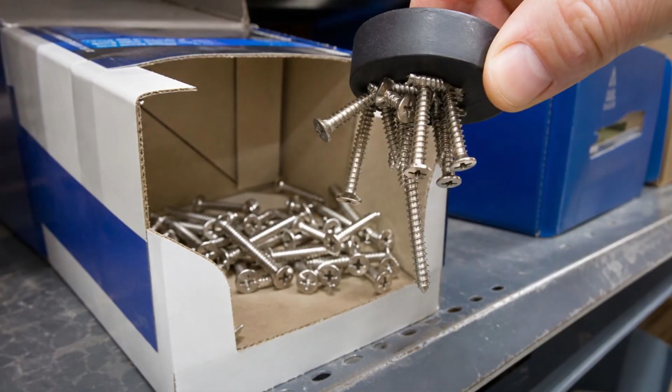Touch a refrigerator magnet to a box of screws labeled stainless steel. Some of them will jump to it. That reaction tells you something real, and it also produces false alarms on perfectly good screws, and almost nobody in that aisle knows how to tell those two cases apart.

We went through fastener industry technical guidance, a Department of Energy manual on counterfeit parts, and the metallurgy of how a screw is formed. One federal audit of its own supply rooms turned up 159 stainless fasteners carrying grade marks that had been stamped on by hand. Those parts cleared a full procurement system on their way in.

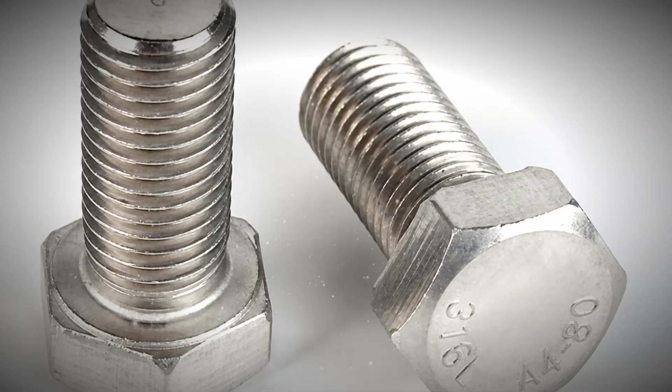The switch away from that alloy happened for a reason nobody printed on a box, and it comes down to how hard a screw must be to drill its own hole. We are covering what changed, what the magnet actually proves, and the two checks that hold up.

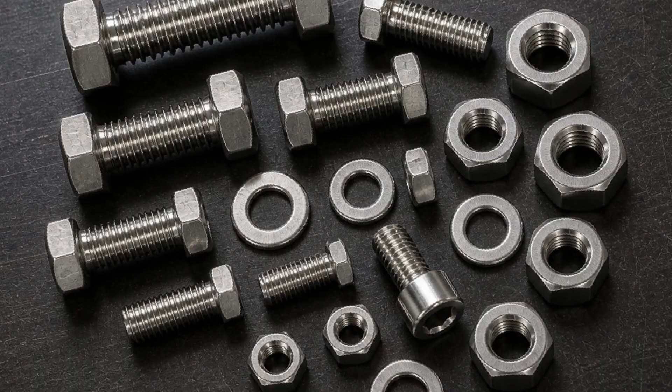Six bins sit on the fastener aisle, every one of them labeled stainless steel, and the prices across them vary by a factor of 4. Nothing on the front of those boxes explains the spread. Stainless is not one metal. It is a family of alloys sharing a minimum chromium content, and the members behave so differently outdoors that treating them as interchangeable is how decks end up streaked with rust after 2 winters.

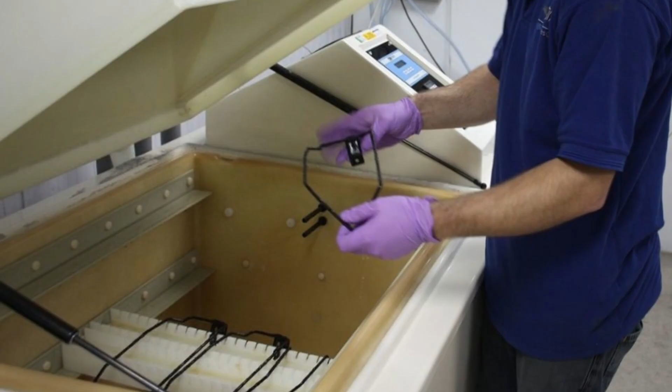The austenitic grades carry chromium and nickel together. That combination resists corrosion extremely well and leaves the metal comparatively soft. These are the 300 series alloys, and they cover most of what a homeowner should be buying.

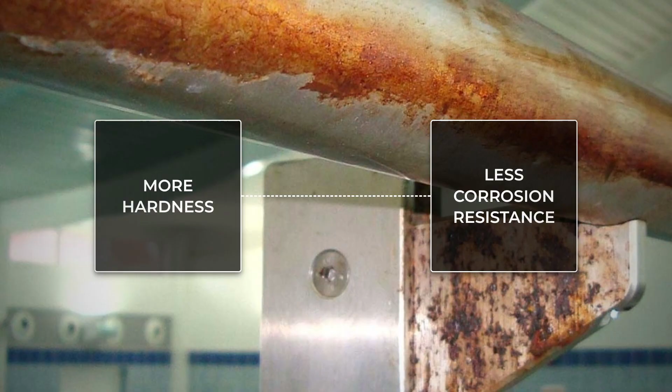The martensitic grades sit in the 400 series, built around higher carbon with almost no nickel. They can be hardened by heat treatment, they hold an edge under load, and they trade away a significant share of their corrosion resistance to get there. Ferritic grades occupy a middle position, magnetic like the martensitics, common in appliances and exhaust systems.

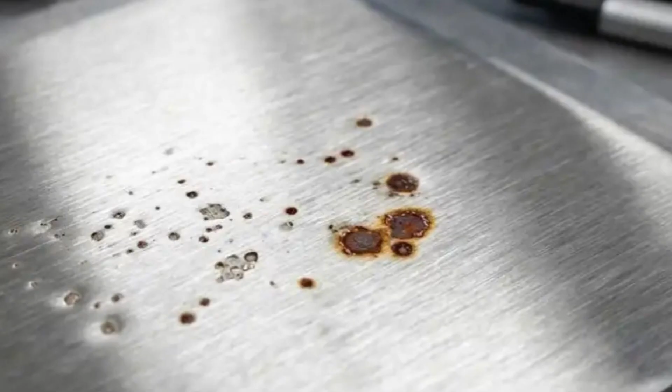Four grade numbers matter once you are standing in that aisle. Types 302, 304, and 305 make up what the trade calls 18-8, named for roughly 18% chromium and 8% nickel. Their corrosion properties are close enough to treat as equivalent.

Type 305 exists for a specific manufacturing reason. It was developed to improve the cold heading qualities of 18-8, meaning it forms into screw heads without cracking or galling during production, which is exactly why deck screws end up made from it.

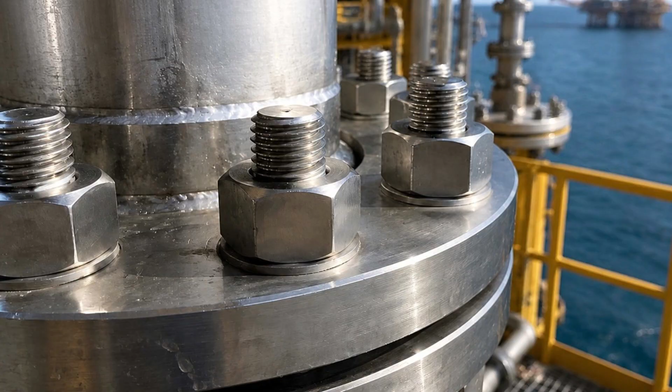Type 316 adds molybdenum. That single addition is what makes it the grade specified around saltwater, pool chemistry, and coastal air. Type 410 is the hard one. 11 to 13% chromium, no nickel at all, heat treatable, cheaper.

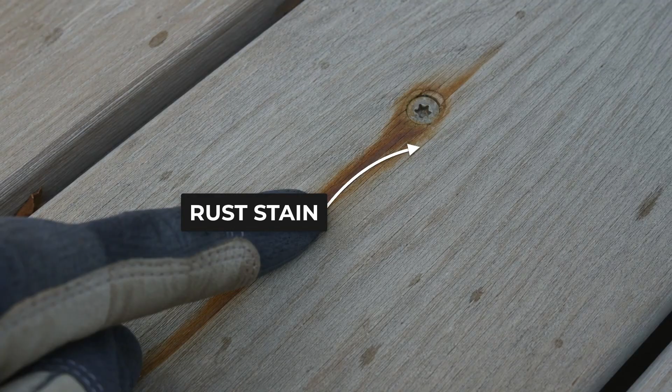The difference shows up in ways you can see. The 18-8 grades may pit and discolor in saltwater or other high chloride atmospheres, and when they do, the color bleeds through finishes and streaks the wood surrounding the fastener. That brown weeping down a cedar board is the screw failing in public.

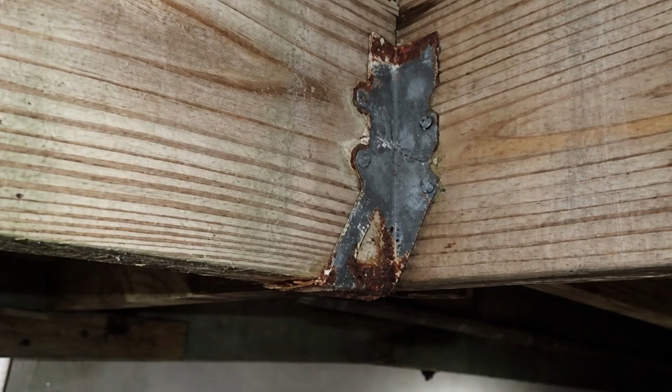With 410, the problem runs deeper than appearance. The 400 series alloys are vulnerable to hydrogen-assisted stress corrosion cracking, and prolonged exposure to harsher conditions can develop harmful rust that weakens the connection itself.

Every bin on that aisle can legally use the word stainless. The corrosion performance between the best and worst of them varies by considerably more than the price does. Which raises the obvious question about the magnet in your kitchen drawer and whether it can sort any of this out.

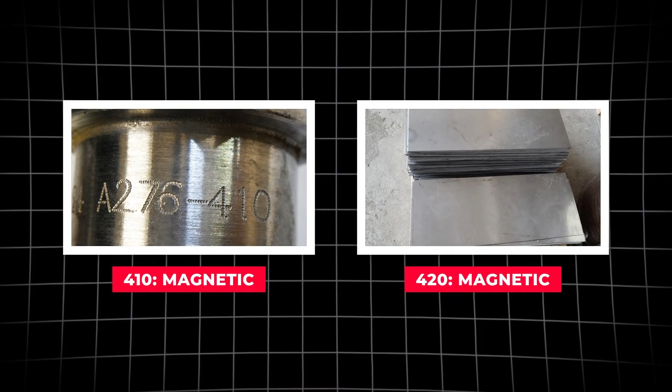A magnet works because of how atoms arrange themselves inside an alloy, and stainless comes in arrangements that differ from one another. In bar stock or sheet, 304 and 316 are non-magnetic, while martensitic grades like 410 and 420 are magnetic by nature. Testing raw material with a magnet is straightforward, and it gives an honest answer.

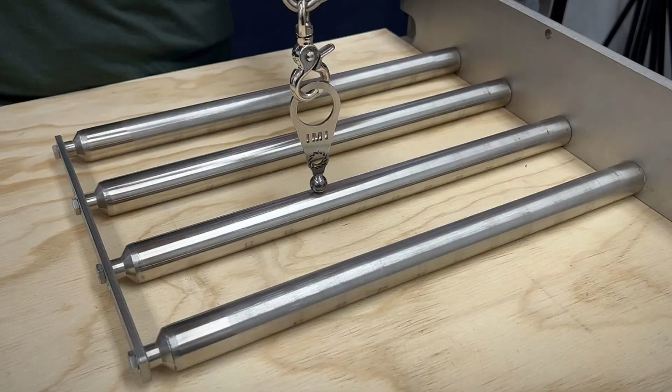A screw is not raw material. Screws are not cast in molds. They are formed by force. A wire blank gets driven into a die to shape the head, then rolled between hardened plates to cut the threads.

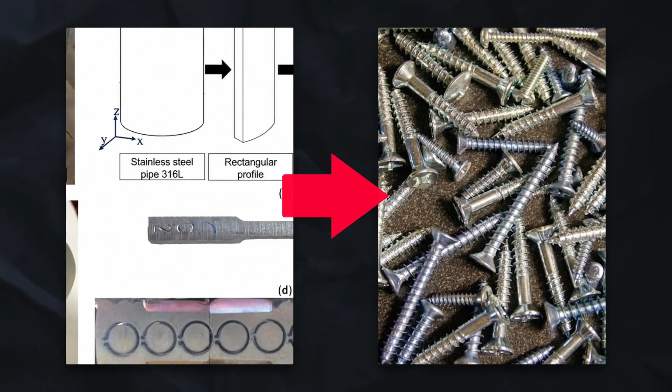Both operations push enormous stress into the metal, and that stress rearranges part of the crystal structure of austenitic stainless. The chemistry of the alloy does not change by a single percentage point, and the screw starts answering to a magnet anyway.

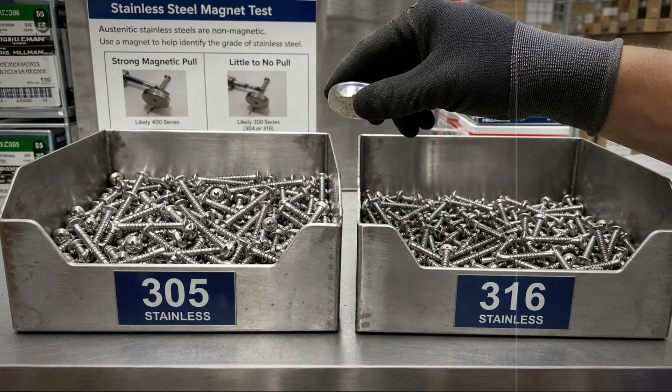The effect is strongest when cold forming smaller items, which means screws and nails specifically. Fastener distributors live with the consequences. A customer opens a box, jams a refrigerator magnet in, watches the screws stick, and calls convinced the order was wrong. Type 316 and Type 305 generally do not develop those magnetic properties because their higher nickel content holds the structure stable through forming.

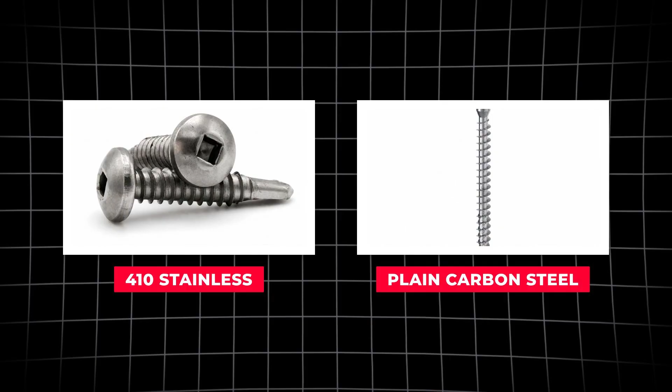That asymmetry is what saves the test, and it turns a yes or no question into 3 separate readings. A screw that slams onto the magnet and grips hard points toward 410 or toward plain carbon steel wearing a bright finish. A screw with a faint, weak pull is entirely consistent with genuine 304 that has been through a forming press. Weak attraction is not evidence of fraud.

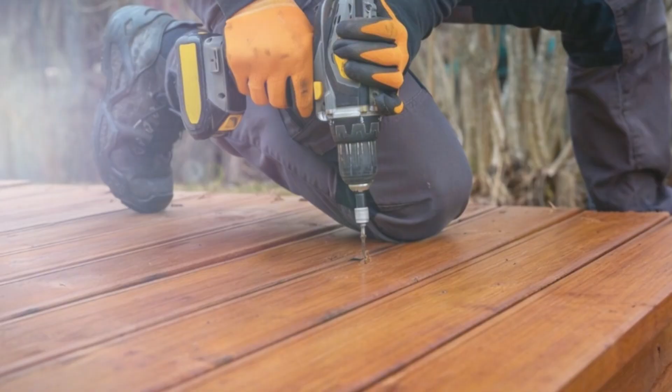A screw showing no attraction at all after being headed and threaded is a strong indication of 304 or 316, the 2 grades most worth having outdoors. One limitation belongs in the open, because anyone in the trade will raise it within about 10 seconds. Professional buyers are advised to stop using magnets for incoming inspection altogether and to demand test reports or chemical analysis of the alloy instead. A magnet sorts probabilities.

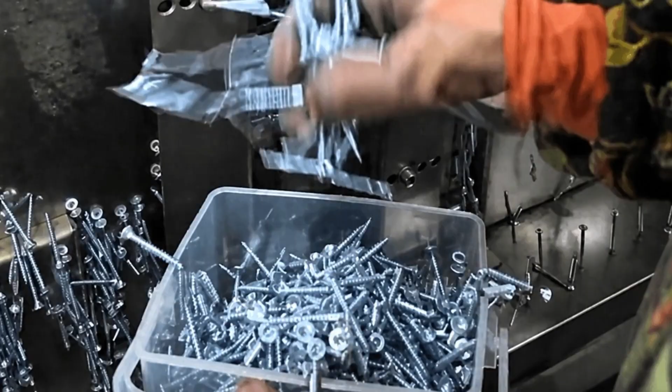Nobody should treat it as identification, and a roofing contractor who does will eventually pay for it. Standing in a hardware aisle with no laboratory nearby, sorting probabilities is worth considerably more than guessing. What the magnet cannot explain is how the harder, weaker alloy ended up filling so many of those boxes. That story starts with a chemistry problem nobody in the industry has ever been able to engineer around.

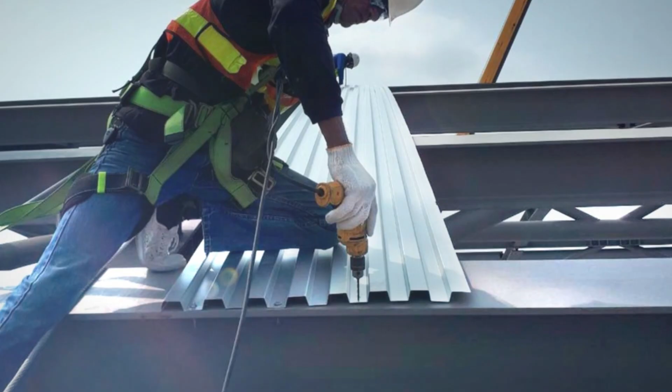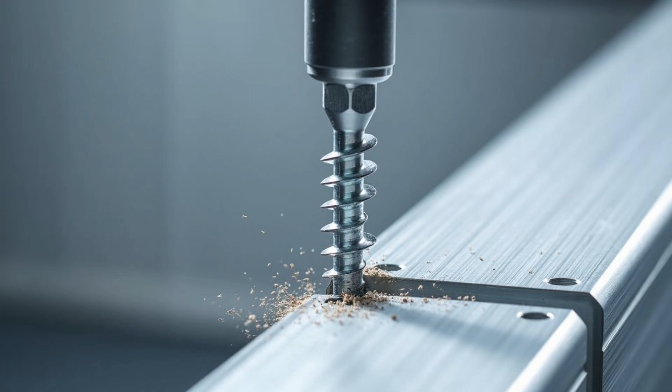The self-drilling screw rewrote how buildings go together. 1 motion instead of 3. No pilot hole, no bit change, no drop drill on a ladder. Roofing, cladding, steel framing, curtain wall, entire trades reorganized around fasteners that cut their own way in. That convenience carries a physical requirement. The point of the screw has to be harder than the steel it is cutting. Austenitic stainless cannot deliver that, and the reason sits in the same number that makes it corrosion resistant.

Carbon content in 300 series stainless runs below 0.08%. Carbon is what allows steel to be hardened. Heat it, quench it, and the carbon locks the crystal structure into something brittle and hard. Strip the carbon out, and that mechanism disappears. The alloy stays tough, stays ductile, and stays soft no matter what you do to it in a furnace.

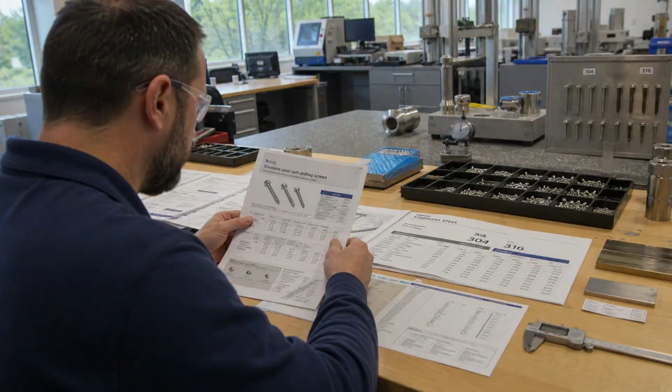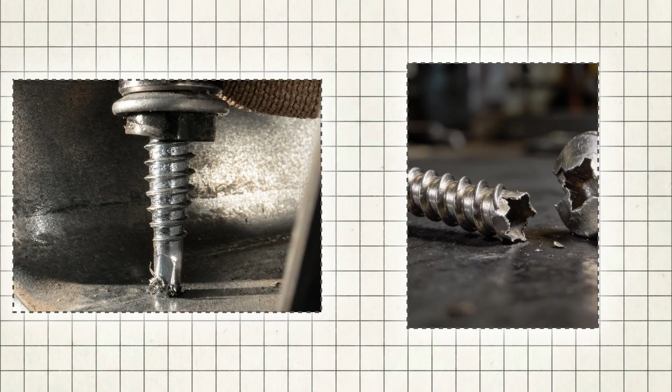Fastener manufacturers state the consequence plainly in their own literature. Stainless self-drilling screws are made from 304 or 316 grades. Those grades cannot be hardened, and the drill point can therefore only cut into softer materials like aluminum. They also flag the assumption that costs people money on job sites. It is a common error to believe that a stainless self-drilling screw will drill into steel.

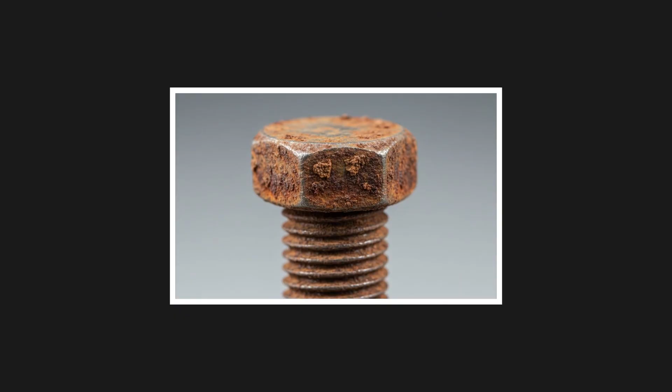It will not. The point deforms, the flutes clog, the screw work hardens the hole it is failing to make, and eventually the head twists off. For manufacturers, the constraint was absolute. Making drill points hard enough to cut steel meant making them out of steel, carbon steel, heat-treated, with everything that implies about rust. So the industry arrived at a fork with no comfortable branch.

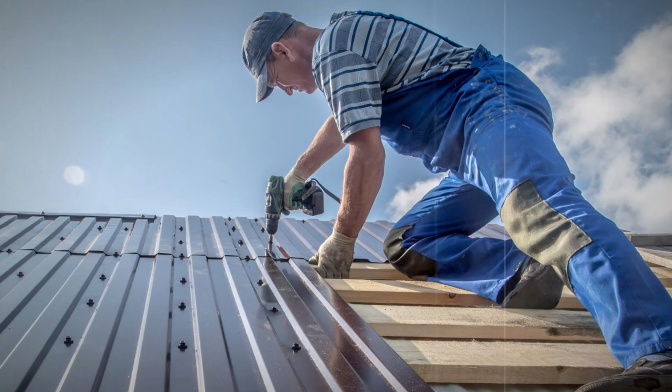Corrosion resistance and hardness are governed by the same element in opposite directions, and no amount of process engineering moves that boundary. Installation speed won, and it is worth being fair about why. A contractor fastening a metal roof is not indifferent to corrosion. He is choosing between a fastener that installs in 2 seconds and one that requires a pilot hole on a job priced by the square. Multiply that across a crew and a season, and the arithmetic stops being close.

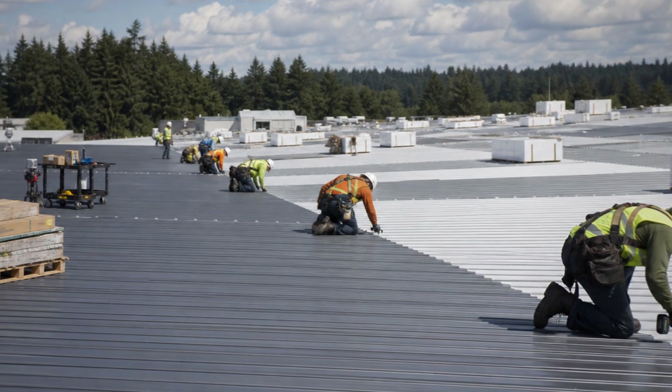None of that was a shortcut or a swindle. It was a real limit in the periodic table, met by a market that valued speed. And the honest verdict on this stretch of the story is that the engineering was sound. The cost cutting came afterward, in what got sold to fill the gap. The gap left by that constraint got filled two ways, and one of them is genuinely correct engineering. Type 410 moved in first. Heat-treatable, strong, cheap, and carrying enough chromium to earn the stainless label without the nickel that drives up cost.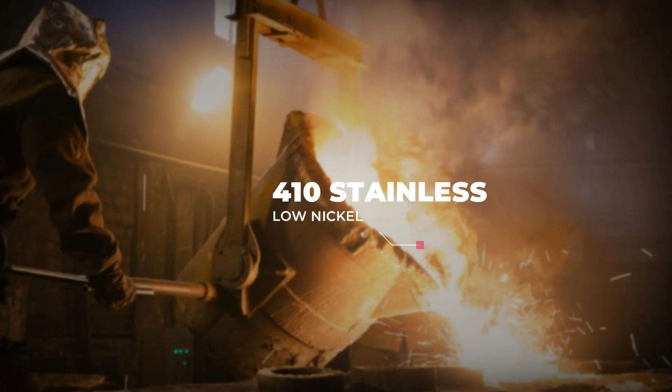In masonry anchors, it is the right answer. Concrete screws and Tapcons come in 410 because driving into concrete without snapping demands hardness above everything else, and an anchor inside a wall cavity is not swimming in chlorides. Roofing screws and self-drillers followed the same logic.

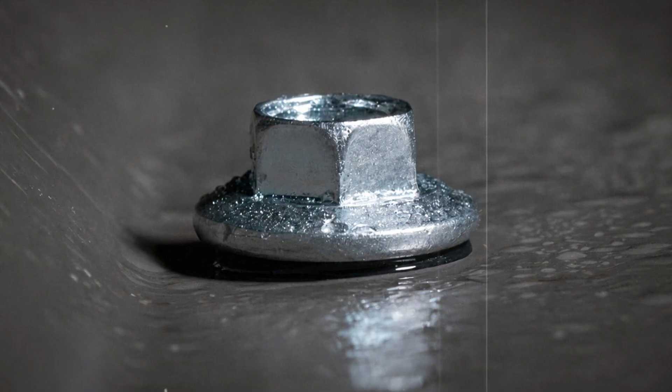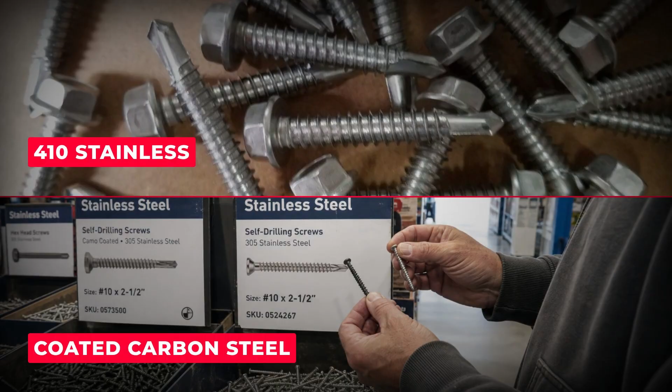Coated carbon steel took the other route. Harden the steel, then wrap it in something to keep water off. That approach works until the coating stops being continuous, which happens the first time a driver bit slips off the head or a screw scrapes through a metal flashing on its way in. Both compromises get sold in bins marked stainless steel, next to each other, to people buying screws for a coastal deck. Then the industry built the thing that actually solves it.

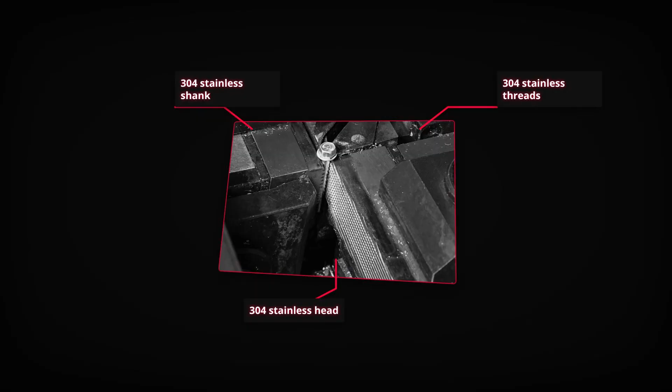Bi-metal screws weld two different alloys into one fastener. The drill point and the first tapping threads are hardened carbon steel. Everything behind them, the shank, the remaining threads, the head, is 304 stainless. The hard tip cuts the hole and forms the thread, and the stainless body follows it in and stays there for the next 30 years.

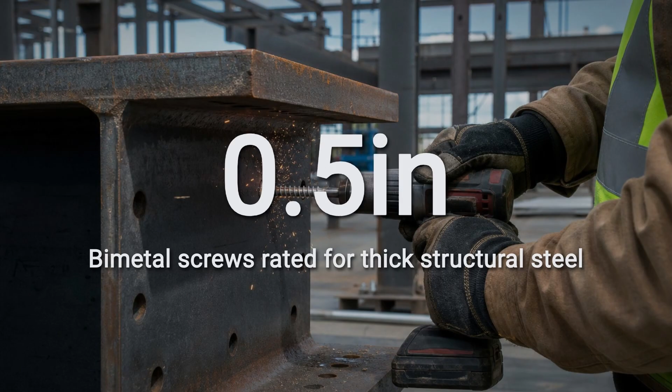Manufacturers describe the sequence as 3 operations happening in one motion. The screw drills, it shapes the thread, it tightens. Some are rated to cut through steel up to ½ an inch thick. Consider what it took to get there. 2 separate metals joined by a weld inside a fastener the size of your finger, produced at industrial volume because a single alloy could not do both jobs.

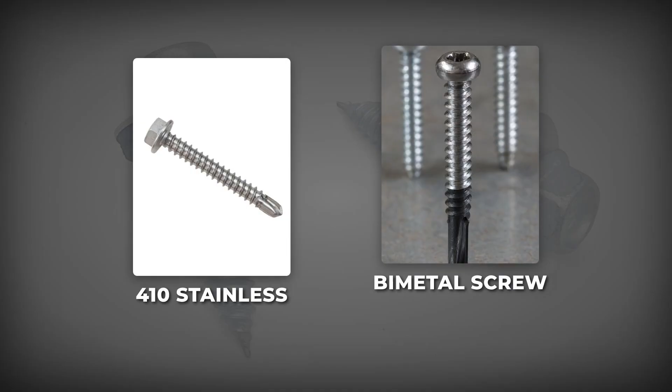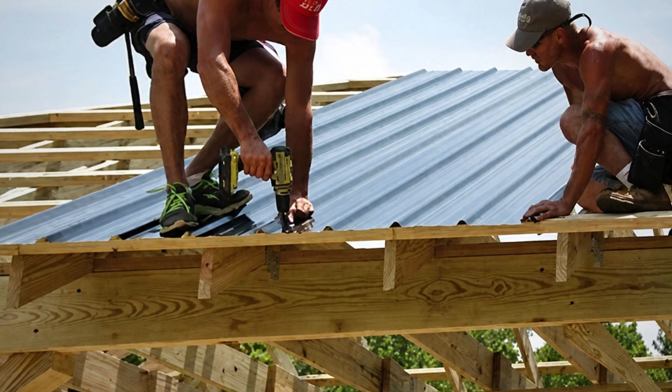Nobody engineers a 2-metal screw for fun. That product exists as a direct admission of the limit described a minute ago. Bi-metal fasteners are specified by name, sold through suppliers rather than in shelf bins, and cost more than either alternative. They are also the reason a metal building can be fastened quickly and still be intact after 2 decades near the ocean. So the alloy question has a clear answer, traceable through published metallurgy and product catalogs.

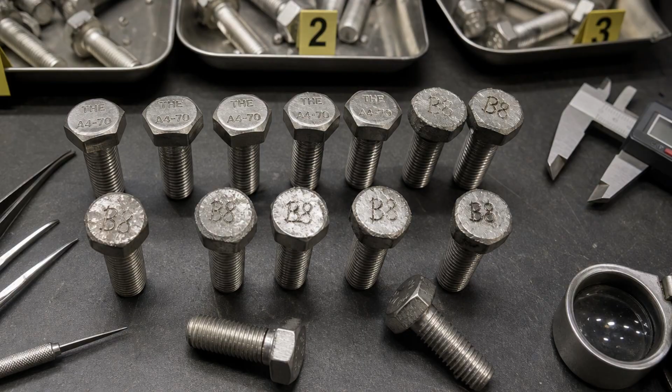The marking question does not. Once a screw has been formed, hardened, and finished, what it claims to be comes down to a stamp on the head, and that is where this stops being metallurgy and becomes fraud. A stainless fastener carries information stamped into its head. 2 marks are supposed to be there, one identifying the grade of the alloy, one identifying the company that made it. The 18-8 convention is 2 radial lines set 90 degrees apart.

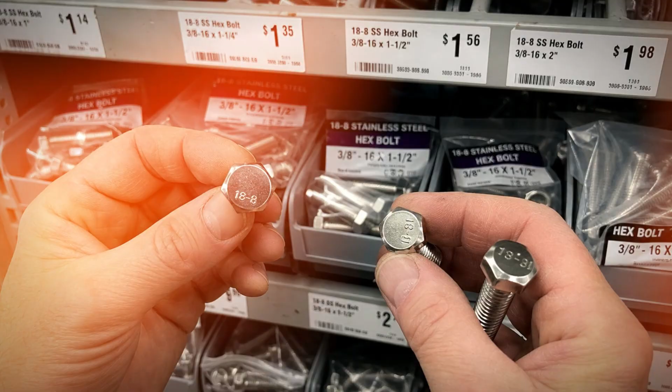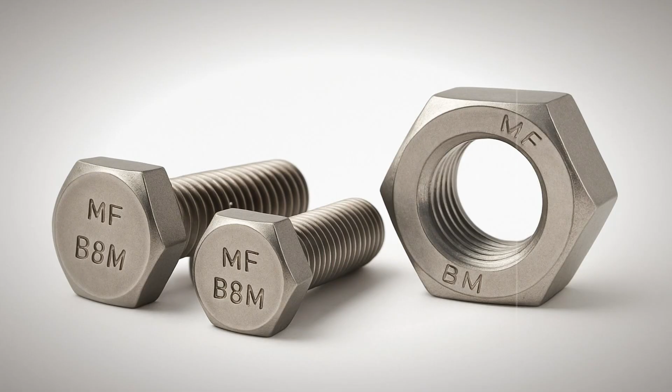Other marks a buyer might encounter include 18-8 spelled out, 304, or F593C. A shop stock inspection at one federal site turned up bolts carrying all 3 of those raised markings mixed together. Then there is B8, which carries more weight than the others. B8 refers to ASTM A320 grade B8, a specification for bolting in demanding service, with defined requirements for chemistry, heat treatment, and testing.

A genuine B8 bolt has been through an upgrading process and certification testing. That process costs money, and the cost is exactly what makes the stamp worth faking. In November of 1993, the Industrial Fasteners Institute issued a fastener advisory about 18-8 stainless bolts, describing a bait and switch running through the distribution chain. The method required no equipment beyond a punch.

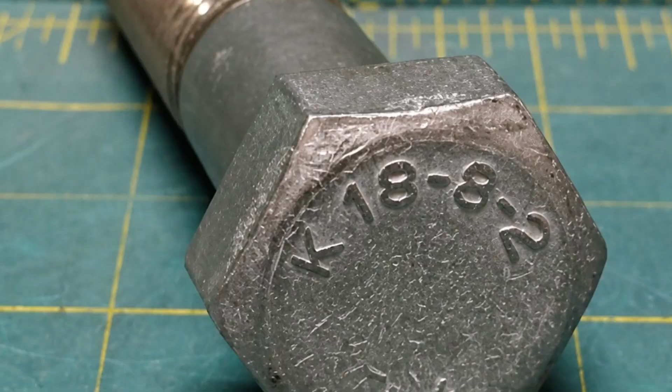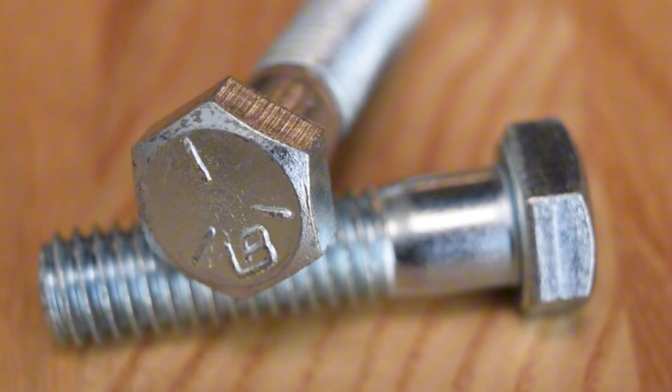A distributor obtains an ordinary 18-8 bolt carrying the 2 radial lines and no manufacturer marking. Somebody hand stamps B8 onto the head. It then sells as ASTM A320 grade B8 without the upgrading process or the certification testing ever happening. Buyers receive bolts that looked correct, were priced correctly, and had been tested by nobody. That fraud does leave a physical trace, and it is the most useful thing in this entire section.

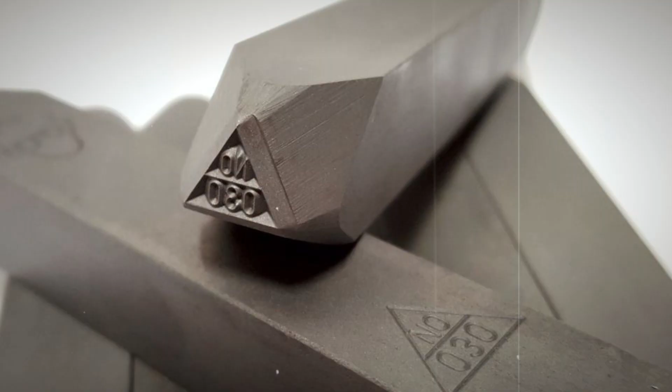Legitimate grade marks are formed during manufacture. When the die shapes the head from a wire blank, metal flows outward into the recesses of the tooling, which leaves those marks standing proud of the surface. Raised. A hand stamp arrives afterward, struck into a finished head with a punch. It sinks into the metal.

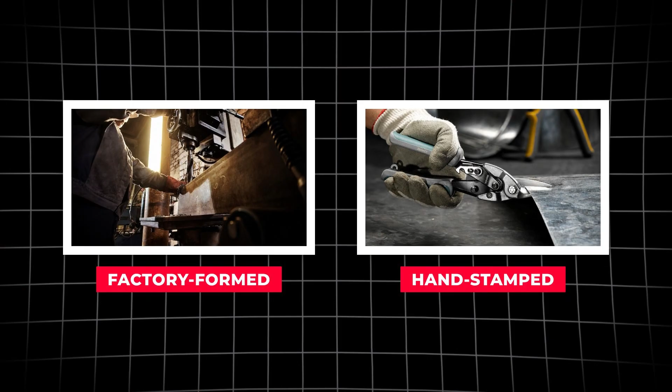Depressed. The guidance that came out of the advisory reflects that difference. A bolt discovered with dual headmark stamping, carrying both raised and depressed marks, should be considered suspect. Two marking operations, performed at two different times, by two parties with different intentions.

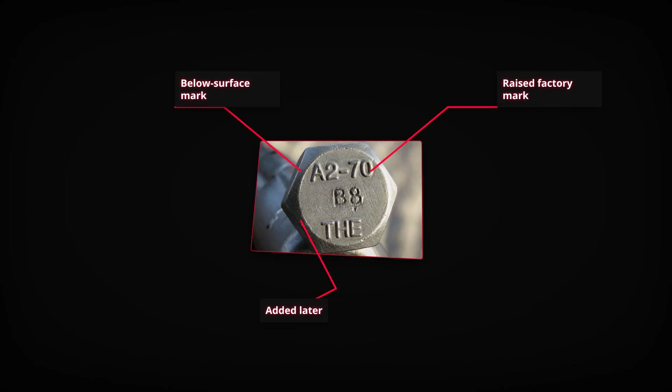You can run this check in a hardware store with nothing but daylight. Hold the head at an angle so light rakes across it. Marks that were made together at the factory will sit at the same level and share the same crispness. A mark that sits below the surface, next to marks that stand above it, was added later by somebody.

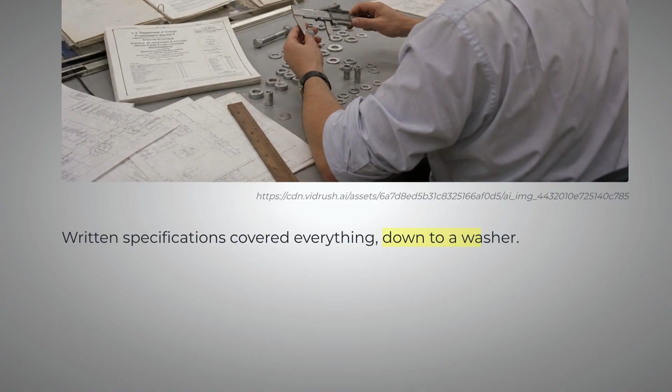That advisory went out more than 30 years ago. What happened when a federal agency went looking through its own supply rooms is the part that should unsettle anyone assuming a large organization would catch this. The advisory prompted the Department of Energy to search its own facility stores. These are national laboratories, weapons sites, nuclear facilities, organizations with procurement departments, quality assurance programs, receiving inspection procedures, and written specifications covering everything down to a washer.

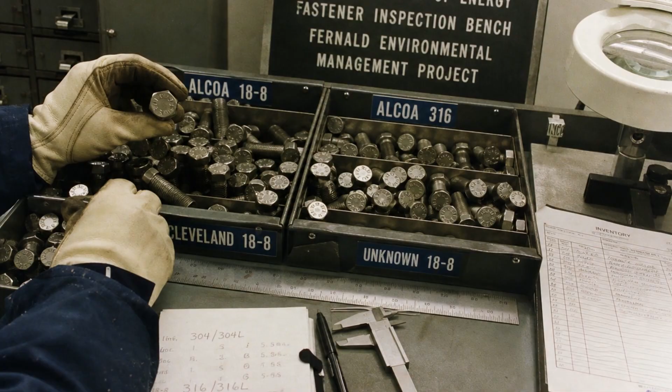Hundreds of stainless steel bolts carrying hand-stamped B8 grade markings turned up in facility stores throughout the DOE complex, alongside a variety of other raised and depressed head and manufacturer markings. One tally within that search recorded 159 stainless steel fasteners with hand-stamped B8 grade marks, together with raised or hand-stamped manufacturer symbols. Nobody smuggled those parts through a fence.

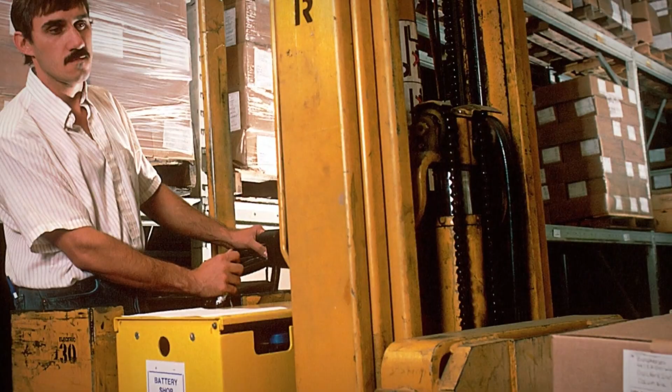They arrived on purchase orders from established distributors with paperwork attached and sat on shelves until a technician needed a bolt. At which point, the obvious professional answer surfaces. Forget magnets and head marks entirely and ask for documentation. A mill test report states the measured chemistry of the batch a fastener came from: chromium, nickel, carbon, molybdenum, each expressed as a percentage against the specification. That document is what the industrial supply chain actually runs on.

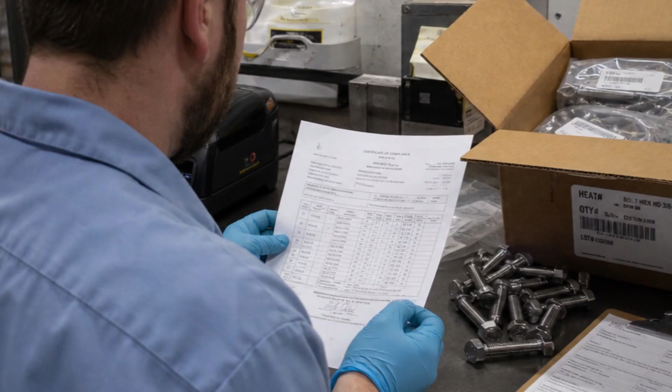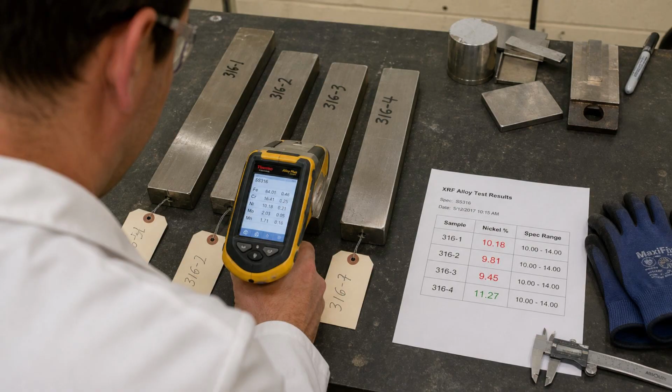An engineer described receiving material accompanied by precisely that. The mill certificates listed compositions in accordance with the specification and additionally indicated 100% positive material identification. On-site X-ray testing, later confirmed by a third-party inspection company, found the material several percent under specification in nickel content on 3 of the 4 lengths tested.

Consider what several percent means in this context. An 18-8 alloy is named for containing roughly 8% nickel. Nickel is the element that makes austenitic stainless what it is, and it is the most expensive ingredient in the mix. A shortfall of several percentage points is not a rounding error or a bad sample. It is a different material wearing the right label.

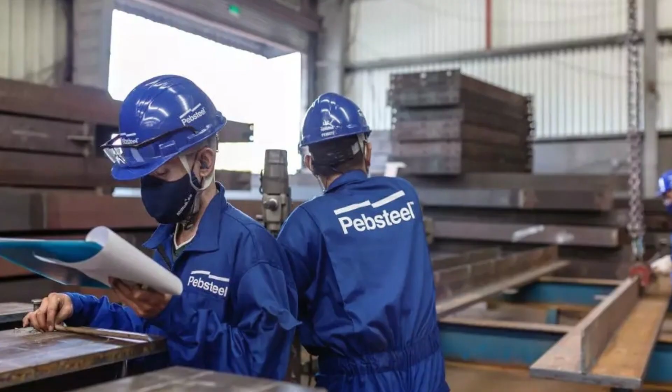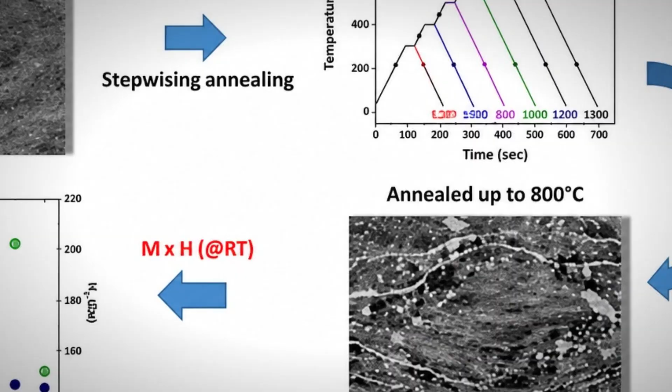Falsification of this kind reaches well beyond anonymous suppliers. Employees at Kobe Steel falsified material test certificates so that materials would appear to meet customer specifications when in fact they did not, which leaves the careful buyer somewhere uncomfortable. Magnets misfire on cold-worked stainless, as the physics guarantees they will. Grade marks can be added to a finished head by anyone holding a punch. And certificates, the thing everyone falls back on, are documents printed, signed, and forgeable like any other.

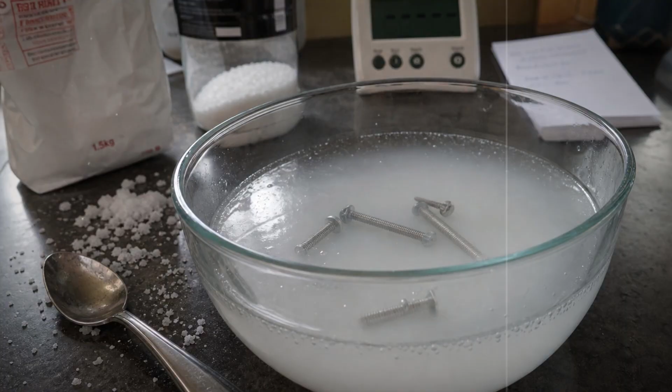The metal itself cannot be edited. An alloy corrodes in salt water according to what is genuinely inside it, indifferent to the stamp on its head, the certificate in the file, and the bin it was sold from. That behavior is measurable on a kitchen counter over 2 days for the price of a box of salt. Fill a bowl with water and stir in salt until no more will dissolve. Drop in 1 screw from each box you are considering, keep them from touching one another, and set the bowl somewhere out of the way for a day or 2.

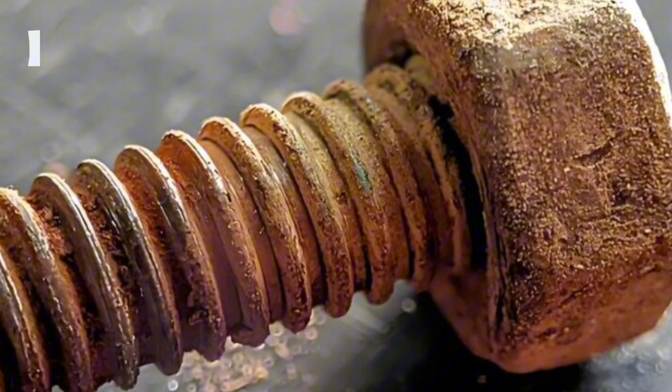Then look at what came out. Genuine 304 and 316 emerge looking exactly as they went in. A 410 screw starts showing small brown specks, usually beginning at the thread roots and around the drive recess, where forming stress concentrated the metal. Carbon steel wearing a bright finish often gives itself away within a few hours.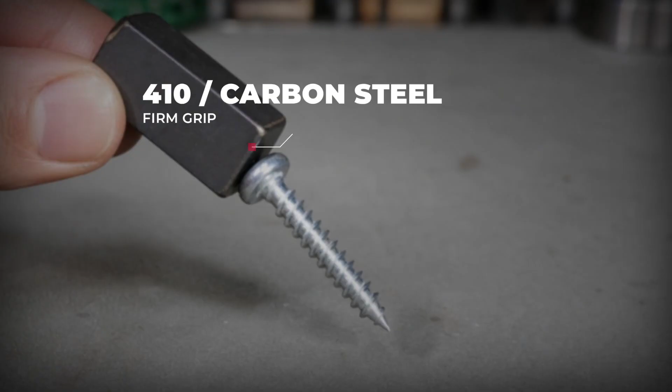The slowness of this test is precisely what makes it valuable. No stamp defeats it, no certificate overrides it, no bin label changes the outcome, because it asks the alloy to behave rather than to make a claim. 2 days and $1 of salt. The magnet gives you the 30-second version, and you can now read it properly. A firm grip suggests 410 or coated carbon steel underneath a finish. A faint pull is entirely consistent with real 304 that has been through a forming press, and it counts as no evidence of anything wrong.

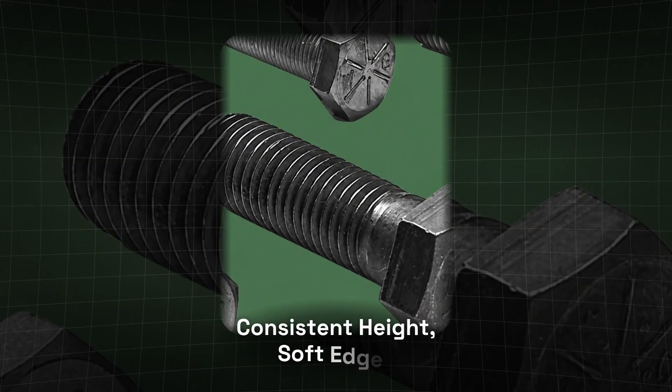Zero attraction on a screw that has already been headed and threaded points toward 305 or 316. Then examine the head under raking light, holding it at an angle so shadows catch in the marks. Every legitimate mark was created in the same instant the head itself was formed, which means they should sit at a consistent height with the same softness at their edges.

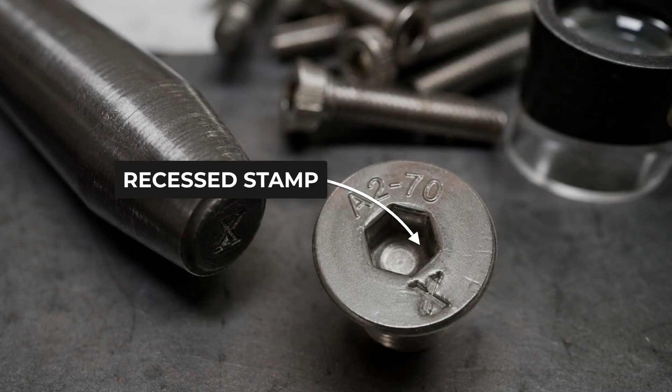A grade stamp sunk below the surface alongside raised marks was added afterward by someone with a punch. A grade mark standing alone, with no manufacturer identification anywhere on that head, is reason enough to put the box down.

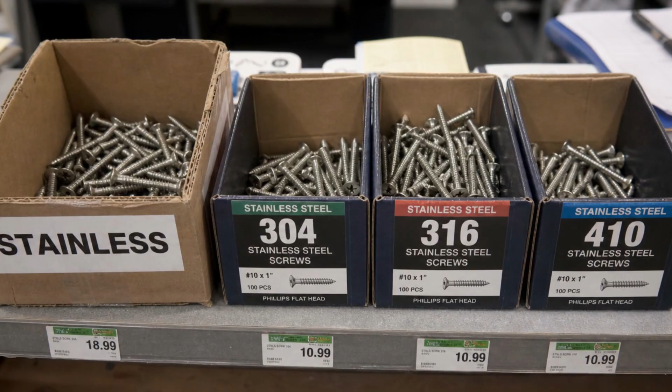The fourth check happens before you touch anything. Read the listing or the box and look for a number. A seller printing 304, 316, or 410 has made a specific claim that a specific company can be held to. A seller printing the single word stainless has committed to nothing whatsoever, and that vagueness is usually a choice rather than an oversight.

Matching grade to job turns out to be simpler than the metallurgy behind it. Inland outdoor work, decks, fences, railings, gates, calls for 305. Coastal air, pool chemistry, road salt, anything that gets splashed with either: 316, and no negotiating on that one. Reserve 410 for situations where hardness does the work and moisture never arrives, such as masonry anchors in interior walls or concrete screws driven into a dry basement slab.

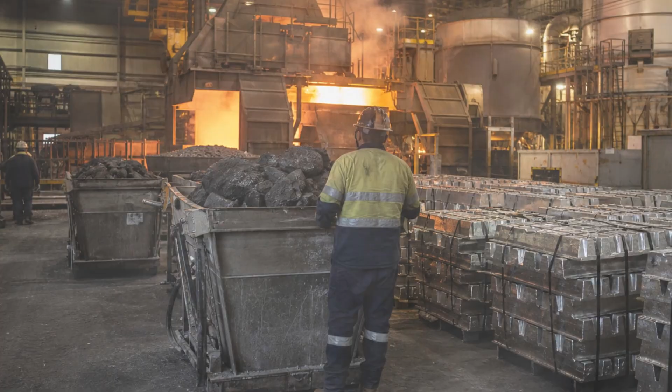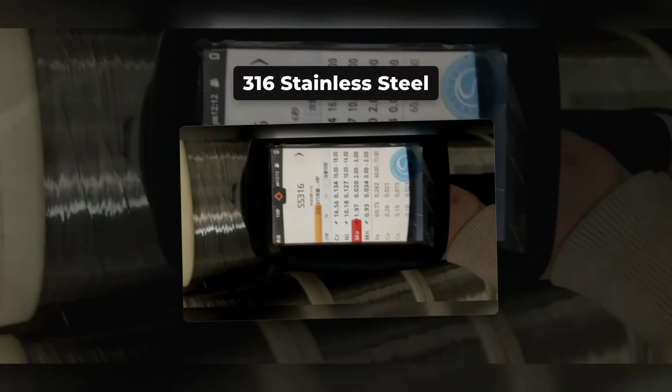The price step from 305 to 316 reflects nickel and molybdenum content, and both of those elements are genuinely expensive. That premium buys the specific atoms doing the corrosion work. All of which leaves one question from the title still open, and the answer is not what the phrasing implies. Nobody stopped making screws from real stainless steel. Type 305 is sitting on shelves right now, sold by name, and 316 is available to anyone willing to pay for the molybdenum inside it.

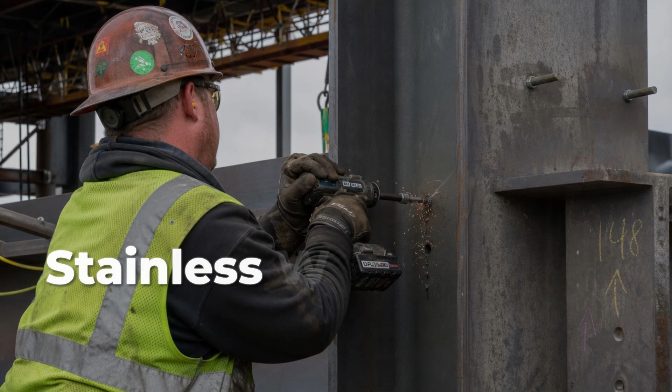The standards defining those alloys never softened, and no committee quietly lowered a threshold the way it happened with lead in plumbing brass or with furniture disclosure rules. Buy 316 today and you receive what 316 has always meant. The change happened around those alloys rather than to them. Screws were asked to do a job the good metal cannot perform. Drilling through steel demands hardness. Hardness demands carbon. And carbon is exactly what austenitic stainless leaves out in order to resist rust.

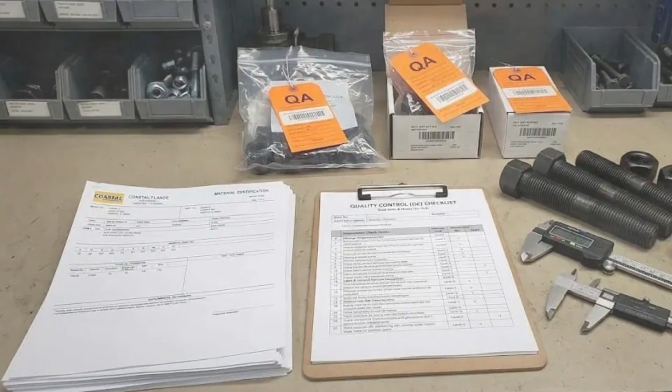Facing that, the market filled its bins with 410 and with coated carbon steel, and the word stainless stretched to cover all of it. What genuinely degraded was the evidence. A hand punch turns an ordinary bolt into a certified one. Certificates get printed with numbers nobody measured. Marking and documentation slipped in a way the metallurgy never did. So, the rule that replaces everything in this video comes down to one habit. Buy the grade in writing.

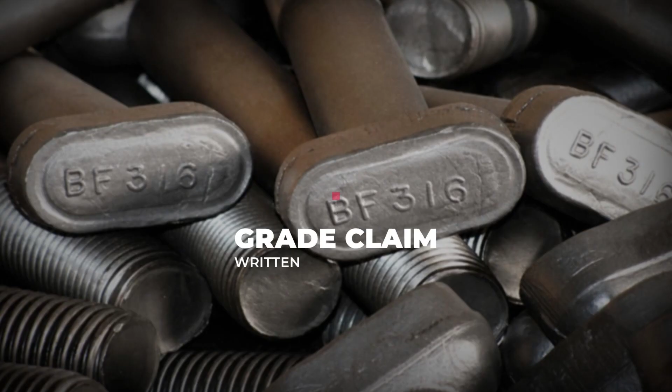A listing showing 304, 316, or A4 is a claim attached to a company. A box showing only the word stainless commits nobody to anything, and vagueness at the point of sale is nearly always deliberate. Around that, 4 checks, none of which takes real effort. Run a magnet across anything headed outdoors and read it as a probability rather than a verdict. Put screws in salt water for 2 days before committing them to work you cannot easily undo. Tilt the head under a light and confirm every mark was made in one operation. Confirm the grade before purchase rather than after.

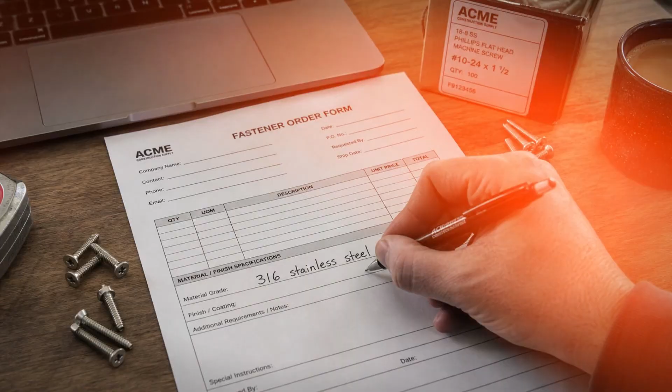One habit costs nothing at all. Put your best grade where replacement is hardest. Under decking, on roofing, behind cladding, anywhere structural. Save the cheaper fastener for the gate hinge you can reach with a screwdriver on a Saturday.